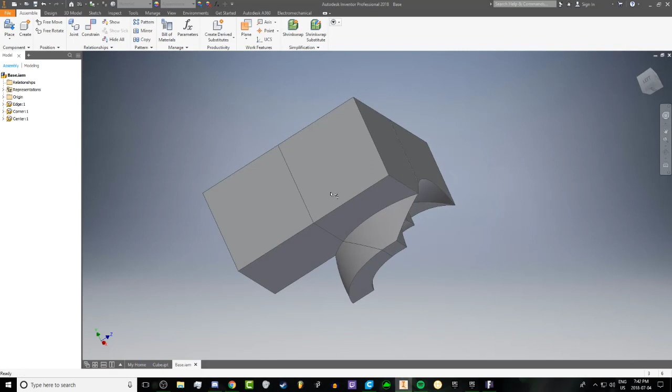3x3 tutorial series. So today, as I said in the first part, I'm going to be showing you how to finish off the edge to make it so that it can perform well in the final cube, and so that it's not super blocky and sharp as it is right now. If this was printed, it would be very catchy, and it would also hurt to touch because everything is very sharp points. So there's a couple ways of doing this.

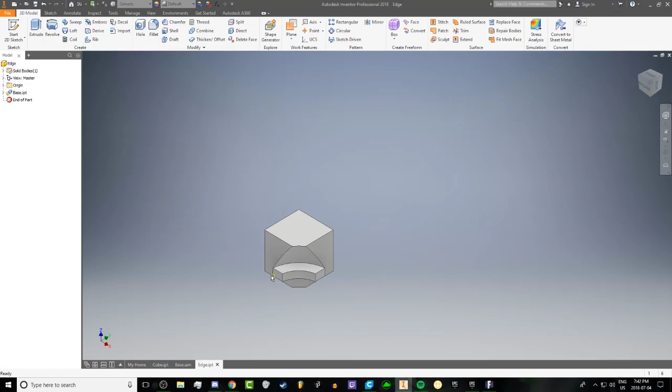You can right click on it here and then hit open, or you can go into the folder where you have it saved and open it from there. In this case, I'm just going to right click it and hit open. So there we go. Everything else is separate in the assembly, and then we have the edge opened in its own part file, so we don't have to worry about anything else.

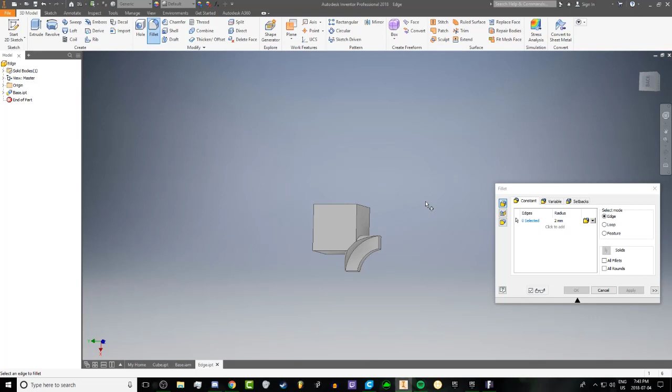So the first thing you want to do is round off the areas that have to do with corner cutting. Depending on how stable you want this to be versus how much you want it to be able to corner cut will change how much you want to round this. Since I'm keeping this simple, I'm only going to use the basic type of fillet in this tutorial. So you want to use the fillet tool and select these 4 edges, and depending on how round you want it, you need to change this.

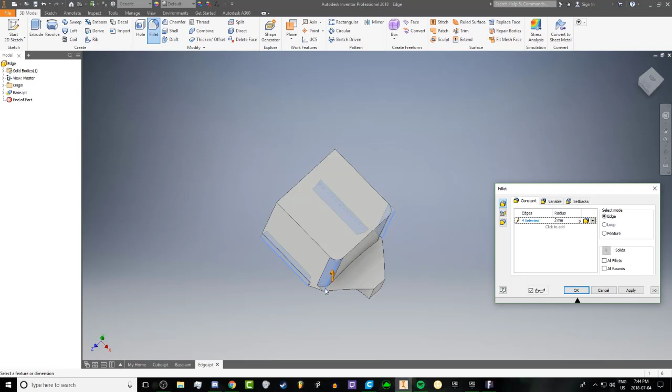I would recommend avoiding going too much over 2 millimeters because that causes issues down here where this fin is, because as you can see, it changes angle, and then that can cause catching issues if you don't round that off enough. Actually, I'm going to show you how to do that in this, and if you want to give that a try, then go for it. So this is a simple way. You just select them and use this number.

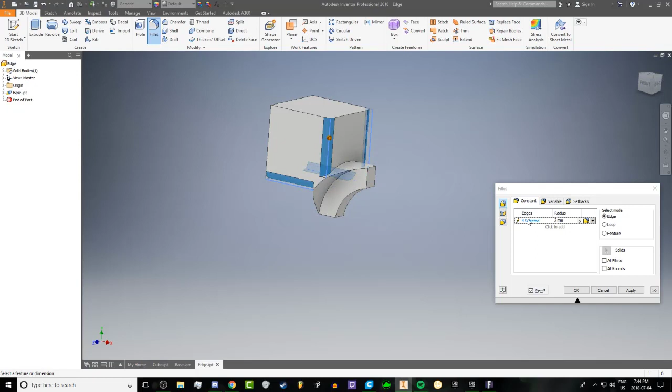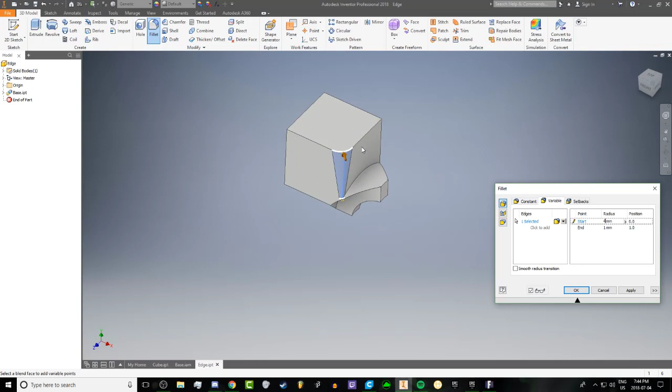So 2 millimeters is probably a good limit for this, but the better way to do it is to use variable fillets. So the start is here and the end is here. I'm going to put that at 1 millimeter, because we don't need that to be that rounded on the inside. Make sure you uncheck smooth radius transition, and then I'm going to make the outside 5 millimeters. That's nothing crazy, but it'll be enough that it should be able to cut a decent amount.

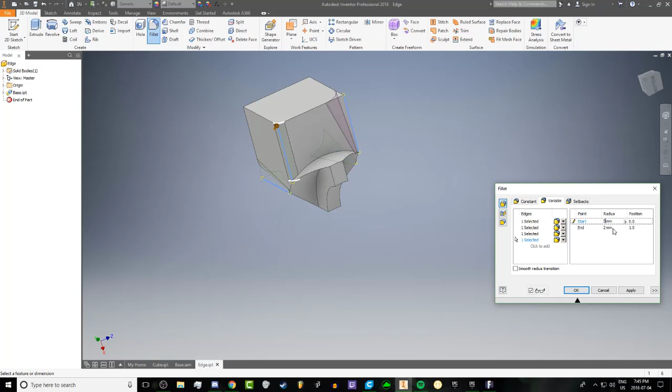Next, we have to keep doing this with each edge of the piece, until you have all 4 done. If you get this error, I'll show you how to fix that, because this does happen sometimes. Alright, so if you get these red fillets, you just change everything to a smooth G2 fillet, like I'm doing here. This just makes it so that you're able to do bigger fillets without getting errors.

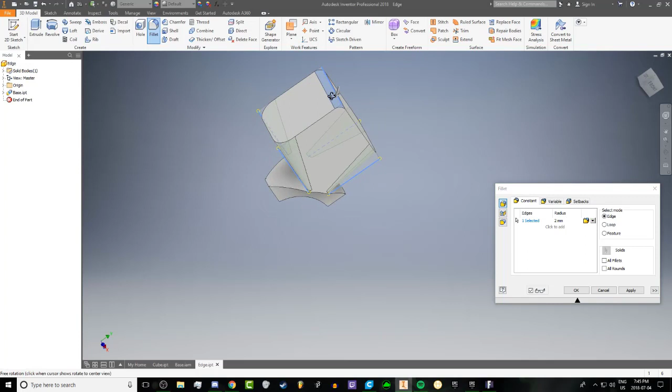So now that's done, go back to constant, and then you want to round off the outside of the edge. I'm going to give this 2 millimeters there, and then 1 millimeter of rounding everywhere else, which should give the outside of the edge a nice finished look, which will not be painful to use once you have it done. So I'm just going to apply. That's a bunch of fillets done. There we go. Now it's starting to look a bit more finished.

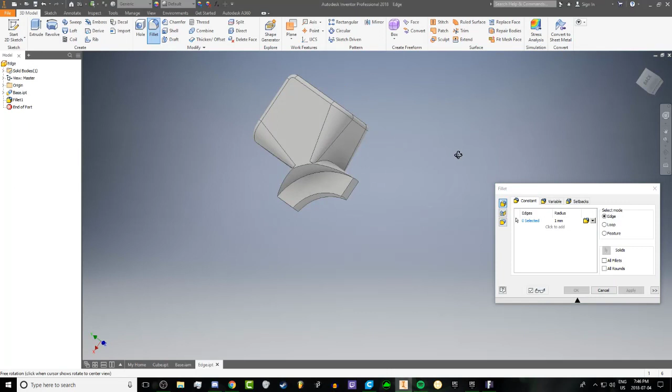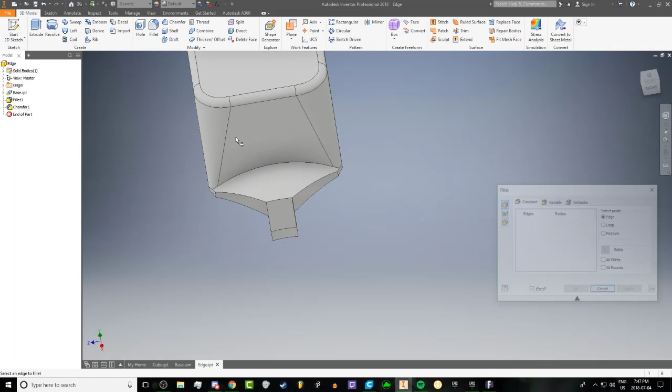Okay, so before you round this though, you probably want to chamfer this first, because it will help prevent catching, and it will stop it from being too close to the corner. About 1 millimeter or so of chamfer is probably fine, maybe a little bit less. I'm going to go with 0.75, but that's a matter of preference. And then after that, as I was saying, fillet these fins here with 0.4 millimeters of filleting. And there you go.

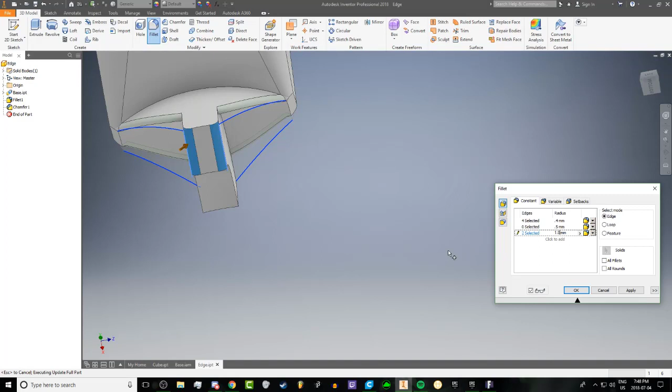Next thing you want to do is round this here so it's perfectly round. Since we did 1.8 millimeters of thickness for this in the sketch, you need to apply the 1.8 that you used before here. And as you can see, as it's the same number we used in the sketch, it's perfectly round. This will help create optimal corner cutting with this design. So I'm going to hit apply again, because now we need to be able to access these new curves that have been created.

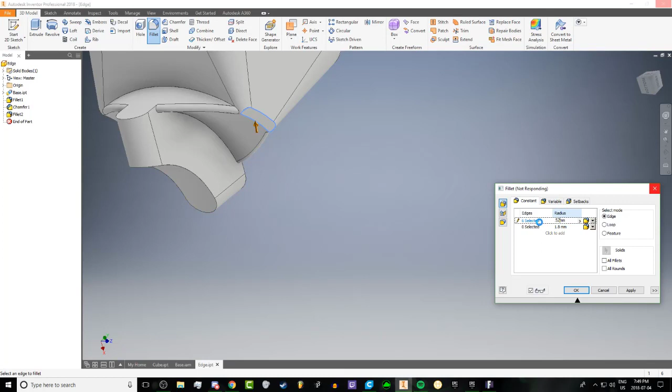Next I'm going to make a 0.5 millimeter fillet on this, to get rid of the sharp edges and make things a bit nicer. If 0.5 doesn't work, you can always shrink it, because this seems to be a bit too large of a fillet. So let's try 0.25 once my computer catches up with me. Yep, alright, 0.25 is good. Awesome. So there we go.

And I'm going to try 0.5 on that edge part that we just rounded all the way right here. So that should be fine, it's not too much. And then the final thing is rounding it off, just like so.

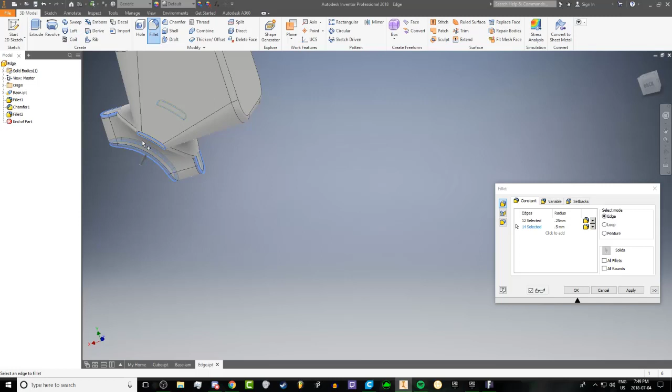So you have it. That's your basic edge done. Now, there is an optional thing. If you don't want to bother doing this, you don't need to. But you can add a torpedo at the end of the piece. And here's how you do that.

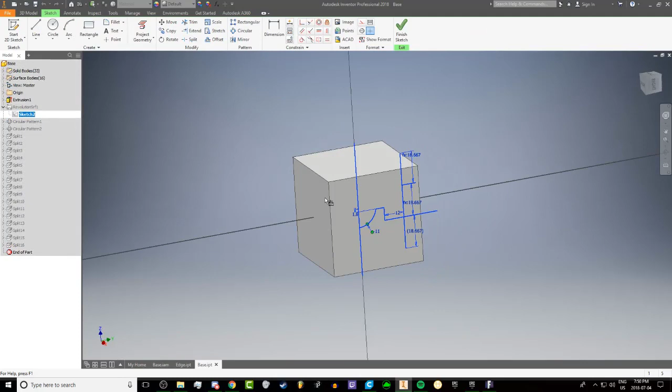Alright, you want to go back into your sketch that you did to cut the whole cube up. And you want to go here, and there's something you can add. Instead of having just this, you can add a torpedo, and this is very important information. I never learned this until like my 5th cube, thanks to NK Cube's tutorials. This is very helpful in making this feature on the cube.

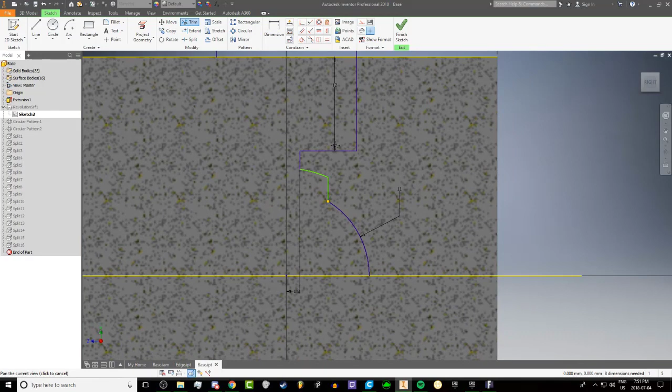So I'll use a center point arc here like that, and then just go down to your 11mm arc, and that's it. So I'm going to trim that, and there you go. So this should create a nice torpedo on the edge, and this is where this comes in. I'm going to make this 3mm, and then I'm going to attach that to that with the coincident constraint, and then I'm going to make this stick out by 4mm. Actually, let's check. So this is 7, so I'm going to make this 5.

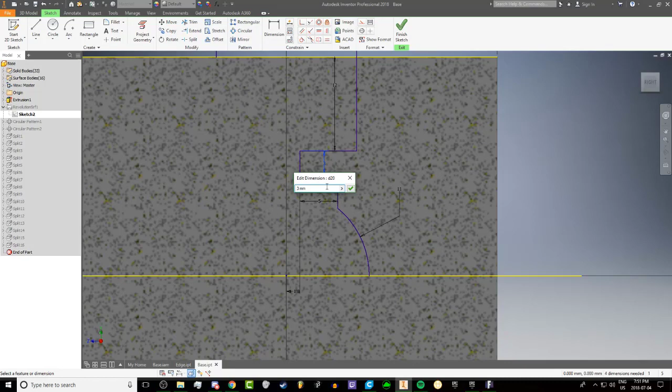You got to make sure it sticks out enough so that it can hold in the corner pieces and the edge properly. So there you go. That's all you need to do to your sketch to make this work. And then when that's done, oh shoot, I accidentally messed with the arc. There. That should be fine.

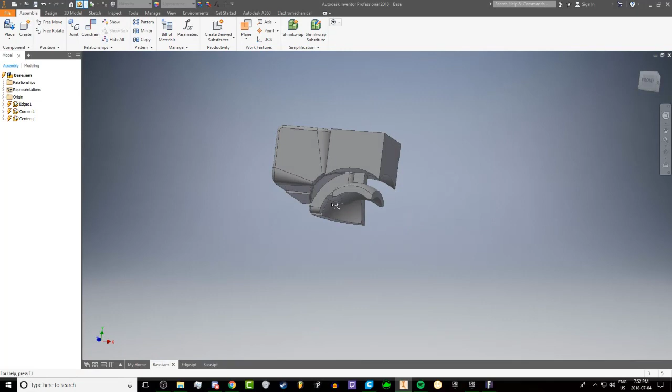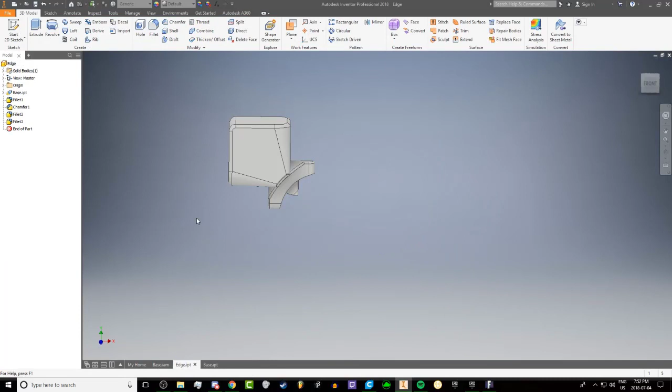There we go. Alright. So now that that's done, I'm going to go back into the assembly, and you'll see that when I do this, it adds in a bunch of stuff to the pieces. So this edge now has a torpedo. Now I'm noticing that this torpedo is very small in the one direction, so I'm going to fix that by editing the sketch and shrinking this to 4mm. So this should help things a bunch. So let's check again, update it. There we go, that's a much nicer size.

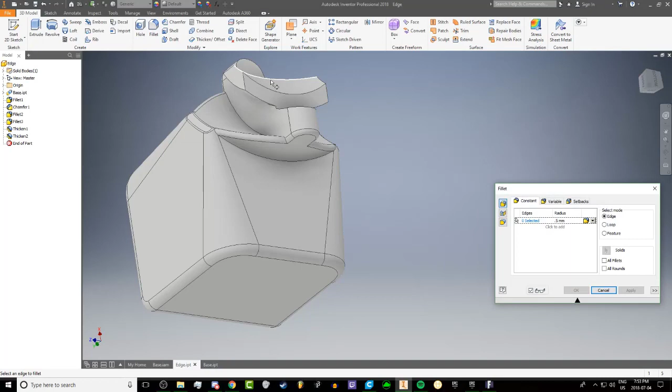Now that we have this, what you need to do to make sure that this doesn't cause issues is you use the thicken tool and remove 0.3mm of material from there and from there. That will help reduce friction and prevent issues caused by this torpedo. Next thing you want to do is you want to fillet these here, and then you want to use a variable fillet again and round off these torpedoes, again making sure you uncheck smooth radius transition and changing it to the other type of fillet.

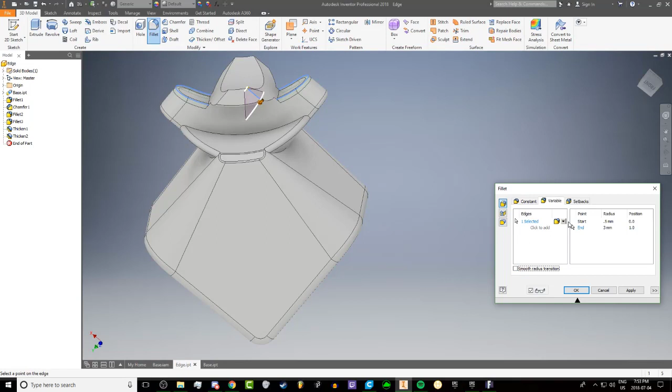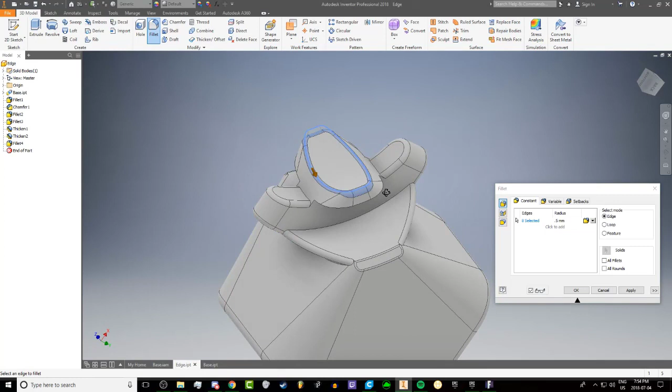So there we go. I'm going to use 2mm here just to make sure it's not too excessive, and then I'm going to go ahead and apply that everywhere else. 0.5 and then 2mm here. Okay, so now that that's done, I can hit apply. And then this is going to be the final fillets to finish this up. So I'm going to put 0.5mm of rounding there. I'm going to put 0.25 under here, and there, and there, and same thing on the other side. Not in places like that.

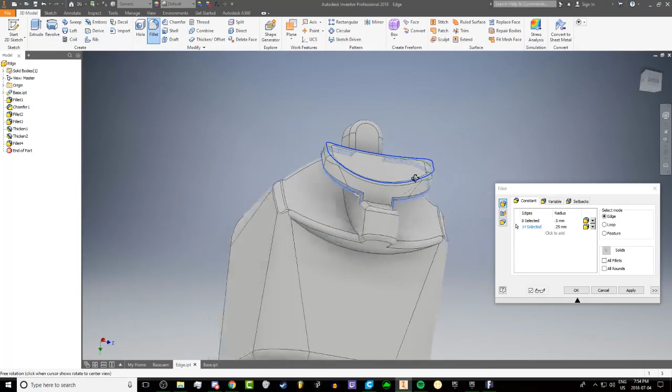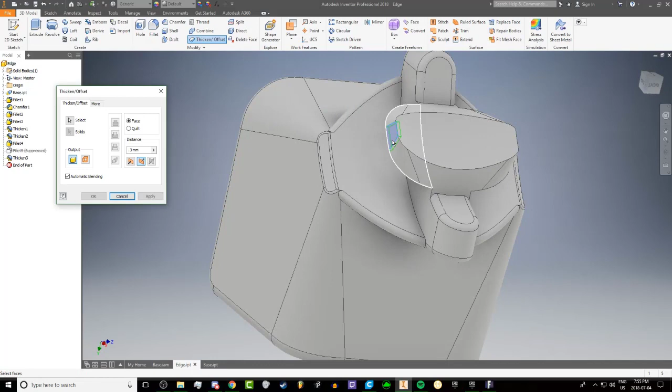And with a quick look over of the whole piece, it looks like there's only one thing left to do. So now that the finishing fillets are done, I'm going to actually suppress what we just did, and I'm going to use the thicken tool again. And you can do the thicken part before. It's not a huge deal. It's just you can do the filleting first if you want to see what the piece is going to look like beforehand. So there we go. Now that is also going to help reduce friction. I'm going to move these before the fillet, and then I'm going to unsuppress the fillet. And there you have it.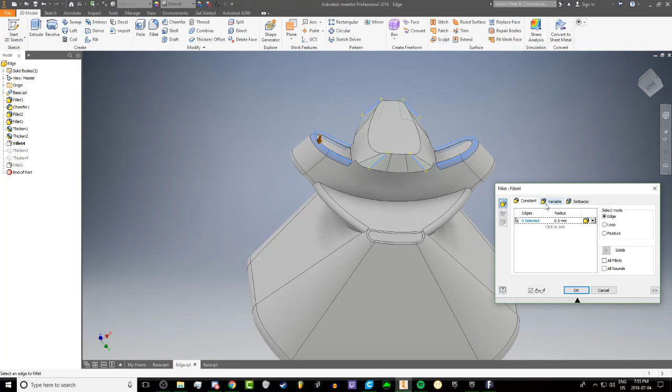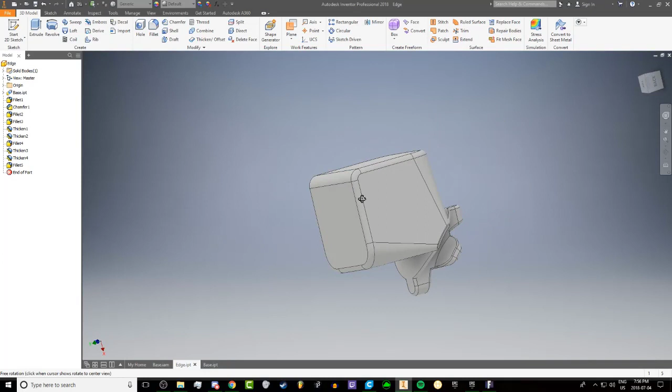So this is a nice looking piece, and just out of preference, I'm going to round this a little bit more. There we go. Now that's a bit more round. That'll corner cut a little bit more nicely. So that's it. That is the finished edge piece. I'm going to save that. And there we go. So this should be an edge that will perform well in the design.